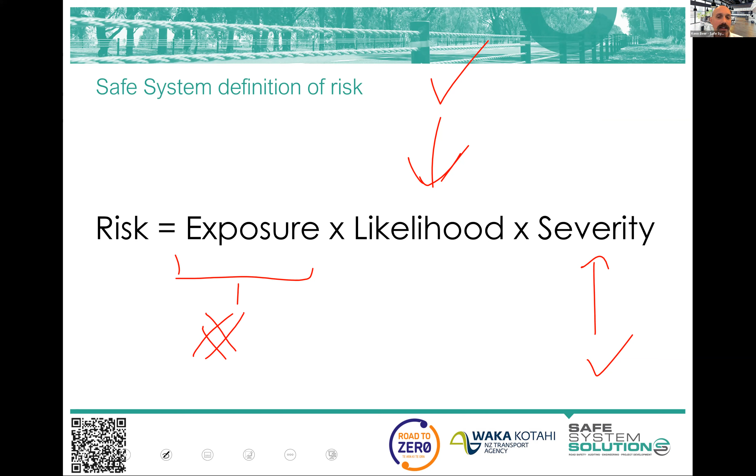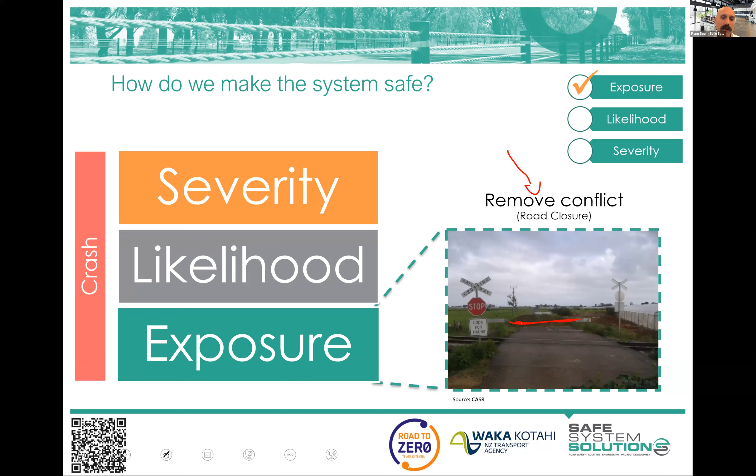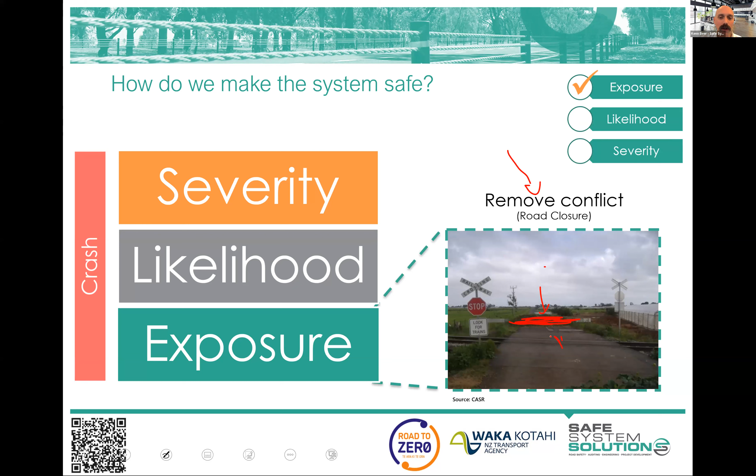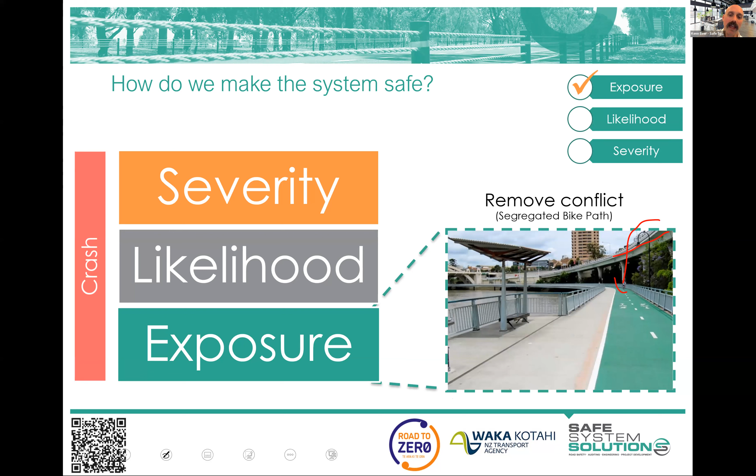It'll probably become a little bit clearer as we go into the next module. But remember, in module 1, we talked about completely eliminating the conflict with this mound of dirt from this level crossing and the road closed sign, that means there's no number of vehicles going through here anymore. Zero number of vehicles. It's bringing that back to the numbers. And again here, we've eliminated the number of cyclists using the road and mixing with traffic. They've removed or minimized the number of conflicts there because they are separated.

And when we get to starting to actually put more rigid definitions to these things, we see exposure says, what are the numbers, and it does say for how long, but I'll talk a bit about that again probably next session. We really don't in practice use for how long. So what are the numbers using the road and thus exposure? That means AADT, side road volumes, number of motorcyclists, cyclists and pedestrians walking or crossing the road.

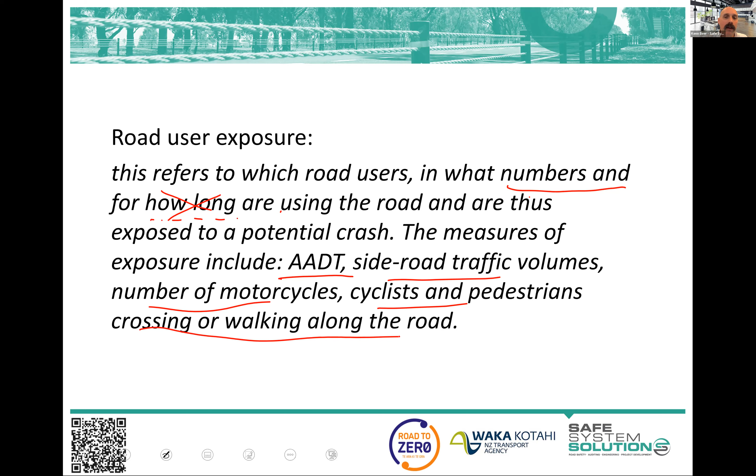Now, as we progress on to refine our ability to actually put a score to these sort of things, we've discovered that Austroads has done a really good job in creating this guidance, but there were some things that either in practice didn't work, or the jurisdictions have decided don't accurately represent things. And one of those was how long pedestrians are walking or vehicles are out there. It doesn't quite work in the way Austroads did it. So jurisdictions came up with their supplements, Victorian government, South Australian government, and most jurisdictions, including New Zealand, tend to just follow those practices.

With those supplements to the Austroads guidance on safe system assessments, we still identified a series of gaps in clarity. And people asking questions like, how do you score this? Or what is this exposure, likelihood, or severity? So there was not quite enough.

So what we've done is tried to fill some of those gaps with these particular fact sheets as an interim until Austroads does another version of the assessment framework or the like. And so you see there's safe system scoring. They're all about scoring. How do you score things? So you may be utilizing these to help you along your journey.

If you are looking at a cycling facility and going, it's a cycling lane. Is it going to influence likelihood, exposure, or severity? A cycling lane on road is a fairly easy one. We know that's likelihood. It's going to change the likelihood of crashes if the cyclist is still exposed to the ability for that crash to easily happen. But what about if we put a concrete separator in between? Is that going to change exposure or likelihood or severity? And what about if we put a barrier between that, exposure, likelihood, or severity?

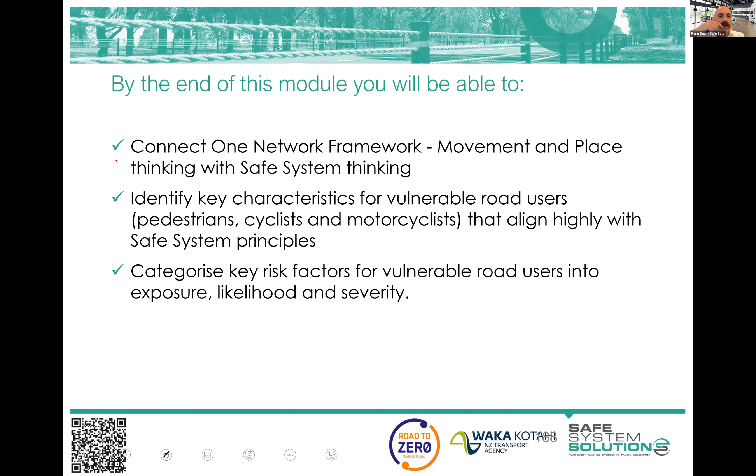So we'll start with this One Network Framework and movement and place thinking, which some of you are probably absolute experts on, and I'm excited for your input. Although for our purposes of undertaking safe system assessments, we don't need to be experts, and we don't need to be into the minute detail of this sort of strategic network planning style stuff. We need to, at a high level, sort of understand it. Why do we need to understand it?

Well, it is certainly not because it's going to change the way we score and assess an existing road or a project. Okay? Because objectives and strategic plans and everything have nothing to do with what we are assessing. We are assessing what is going to happen, who's going to be exposed to crashes, what's the chance that they're going to crash, and how bad is it going to be, right? And that's just that.

Where this comes into play in a super important manner in a safe system assessment is when we come to suggesting things to the project to better their alignment with safe system principles. We say, we like this idea, but it's only addressing the likelihood. We suggest you do this to address the severity. Well, we want to know that what we're suggesting aligns with their strategic objectives for the network and for that area, and for that road or street. And that's where we get ourselves a bit of understanding.

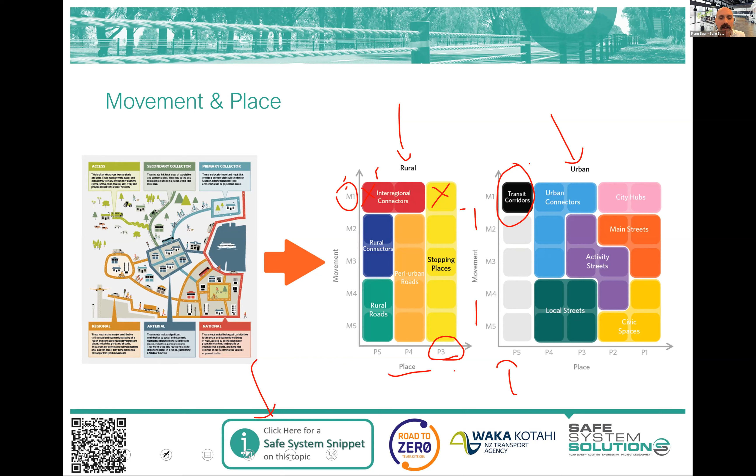Anyway, I won't delve into it in much more detail. We've got a snippet down here if you're interested. Get the PDF, click on the snippet, and you'll get a little bit more info. But let's look at these in a little bit more detail now. And what we'll do is a few little interactive exercises, because I want you to do something here.

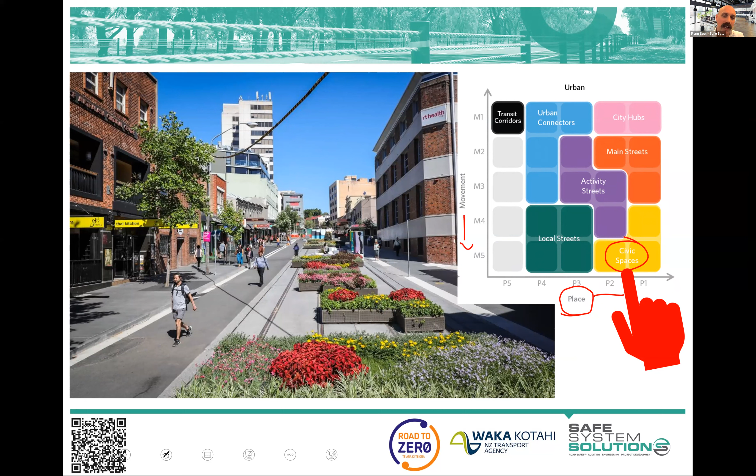What I want to do is start in this yellow civic space area in the urban environment. We saw these high place value areas, people recognizing it's got a very low movement requirement for one reason or another. Civic space. We saw a bit of an explosion of pop-up areas that were more recognized as civic spaces with tactical urbanism, and COVID hit, and then everybody jumped on board this excitement, and that's great to see, because it's a real activation of a lot of these areas to recognize their place value and clearly say, well, it is civic space and we're able to do some of this stuff.

But let's take this artistic impression, and I'll give you a few minutes to come up with ideas on what we could change to this area that would make it more of a civic space in terms of the movement and place categorization. What would make it more? What would increase its alignment with safe system principles? And I want you, every time that you pop an idea in, to put either an E for exposure, an L, or an S in brackets after it.

So you can propose a change here, and do whatever you want that increases its civic spaceness, improves alignment with safe system principles, and then tell us how you've done that with whatever you've changed, and does that lever of getting better alignment with safe system principles come from exposure, likelihood, or severity? So feel free to pop a few in, and I'll give you 3 minutes. We'll do another one of these shortly with a longer time, and then you can have your stretch and fill your coffee and your water in about 10 minutes. So let's have a pause there and back in 3 minutes.

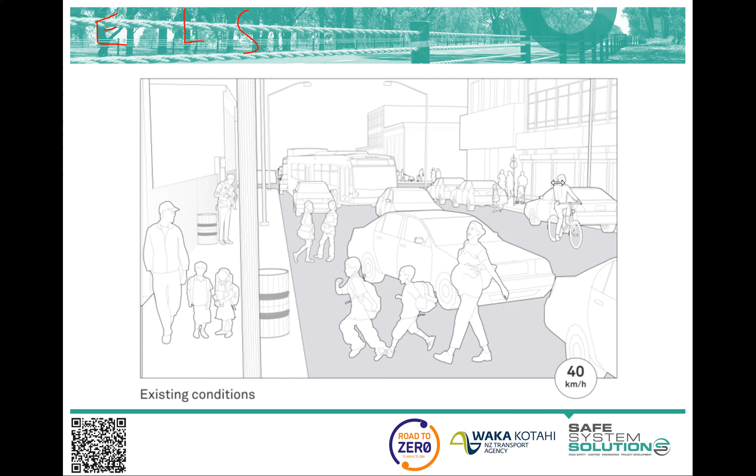Shared zone design is fun because you completely throw out road design, and you start with making it this. You can put furniture in all sorts of spots. There's one I particularly like in a regional city in Victoria, which if you ever drive through, which you usually don't because it's slow and it's annoying, which is great. There's a win all around there. If you're driving in there, you're driving along really super slow.

It's got cobblestones and all sorts of things, and then fountains start popping up in weird jets of water. It's like, oh my god, should I? Well, I've got to get out of here. Yeah, it's good. So yeah, I like that.

There's a number of people talking about traffic calming features, ways to reduce the speed. That's really good as well. If there is some movement requirement through an area, but you're trying to hold on to as much of that civic space philosophy as possible, you've got to slow those vehicles down, okay? And you've got to keep them really slow. And traffic calming features are great. Now, they are going to influence the likelihood and severity.

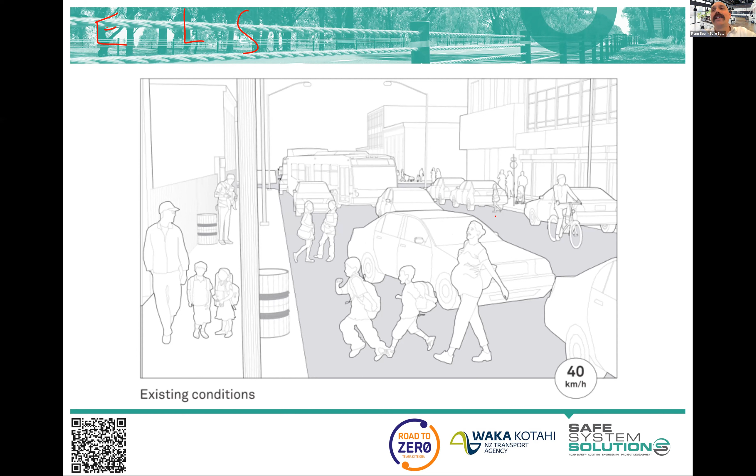I'm gonna stop reading awesome comments, and I'm gonna just show some artistic mock-ups. Okay, so maybe areas like this, there is a bit of movement still assigned here, assuming some movement is required, but it's that shared zone style area. I don't think that this artistic impression should have a particular pedestrian crossing there. It should have been a shared zone as the whole thing.

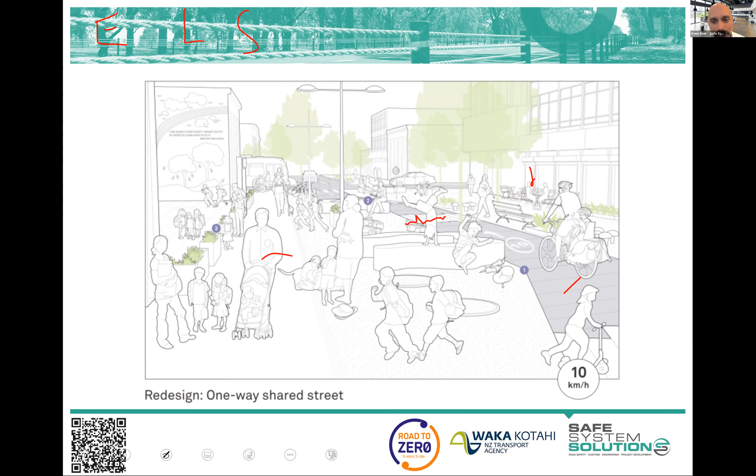And it's got good civic space elements. You can see all of the excitement and the people having coffees and playing and trading and all of that wonderful stuff. Great livability, great civic space. Got a little bit of movement through there, yeah, some good stuff. As the movement requirement rises, okay, you're still grasping onto that little bit of civic spaceness, trying to say, oh no, we're still civic space.

This is where we start to introduce, as some of you said, the idea of these bike lanes, bus lanes, dedicated areas for vehicles. We're still trying to maintain as much of that civic space as possible, and that's then as crossings come in. But you're really starting to push outside of civic space territory with this. I mean, in practical reality, this is probably how you transition these areas, or potentially. It's a bit to that.

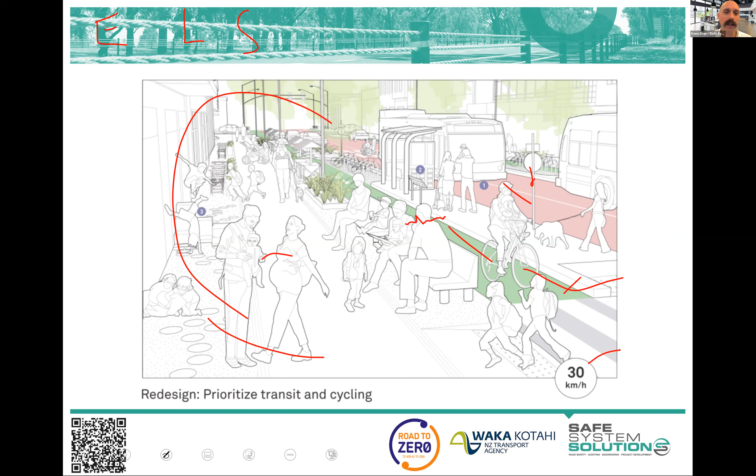Okay, I'll jump through this one quite quickly. Local streets. What we know with local streets is we're down at low place and low movement. Okay, so the residents don't like it when we tell them that their local street has low place value, but it's that societal whole of place value, different metrics that are used. But anyway, these areas with that low place value, but the low movement function gives us the opportunity to significantly

bring down speeds. Okay, if we talk to the strategic plans and our safe system assessment, and they say, yeah, we've categorized it as local streets. It's an M5 in movement for vehicles and for cyclists as well and the like. We go beauty. Because when we get to making recommendations, we can really pull speeds down significantly because they've actually actively told us we do not want people driving through here fast. We don't want people using this as a run through.

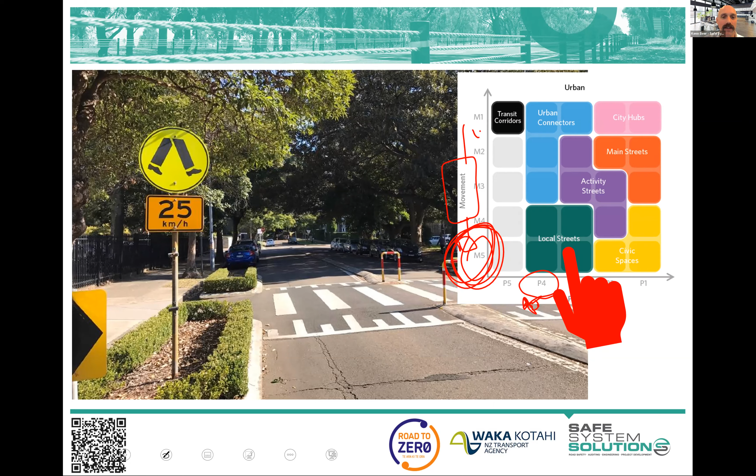That's not part of our strategic objective of this area, and our ability to align highly with safe system principles is great because we know speed's so critical to safe system. If they'd said to us it was a really super high movement, then we might be in a bit of a challenge. But it's kind of got us into an easy space there, and so this one's probably got far more place value than that. But you're seeing similar stuff to the last one where we're able to blanket speeds down. We can, by the nature of it, give it more place value because we've done some of this stuff. But anyway, some just sort of mock-ups, and you get the idea.

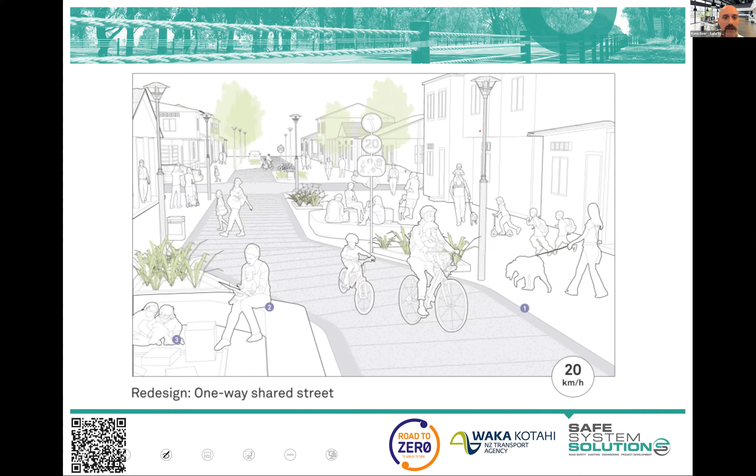But let's do a little more challenging one, and this is where we'll take that bit of time to have the stretch and the fill up of the coffee, the third coffee for the day, and we're going to go into this very

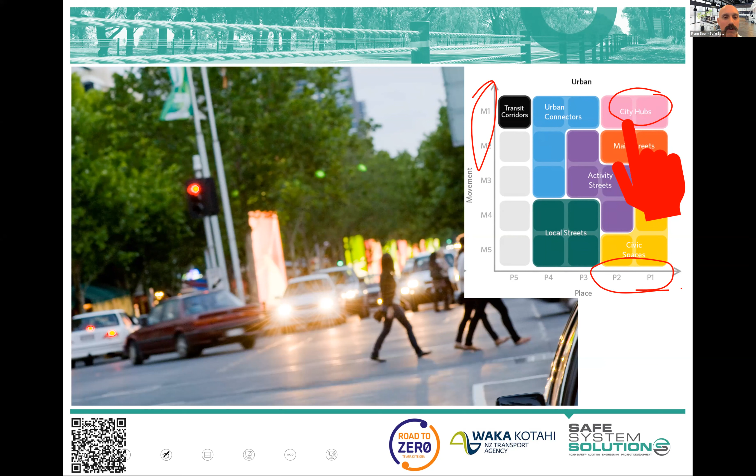prickly, challenging area of city hubs. And why is it challenging? It's because we've got high place value, but we've got high movement requirements as well. And movement could be vehicles, cyclists, public transport, but we're trying to move stuff through there, but we're also trying to have this really good high place value. So this is the artistic mock-up we're going to use for the next 5 minutes, or 5 minutes after I stop talking.

And you can see here that it's a high speed road. We do have pedestrians, we have cyclists, we have like this pedestrian overpass, we've got pedestrian fencing in the middle of the road as well. But what we're aspiring to, our strategic planners have said, with this road we aim to do upgrades to, and we want it to be in this category of city hubs, right? So we want high place value here. We want to make an important place for community, as well as have movement function for cyclists, for cars, for freight, for public transport, and for people to be able to walk through the area, as well as all of that place value stuff.

So very challenging territory, but same little exercise. Pop in some ideas on alterations to this area to give us higher place value, higher alignment with safe system principles, and movement for all of those road users. So you've got 5 minutes from now. So seeing some great stuff coming in again. Well done. Let's work our way through and we'll see what we've got here.

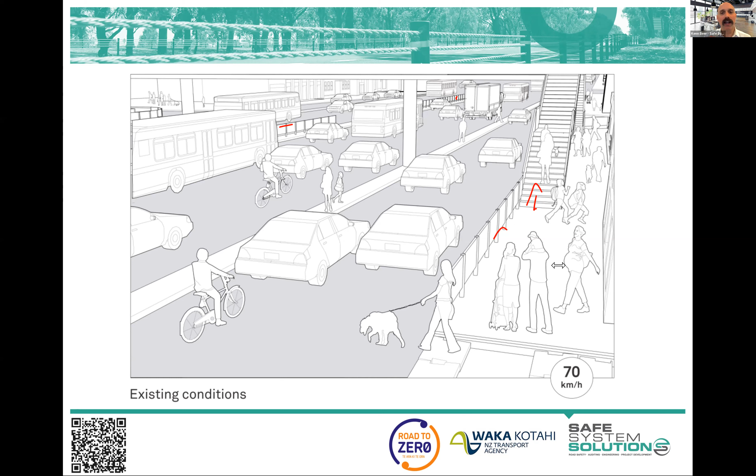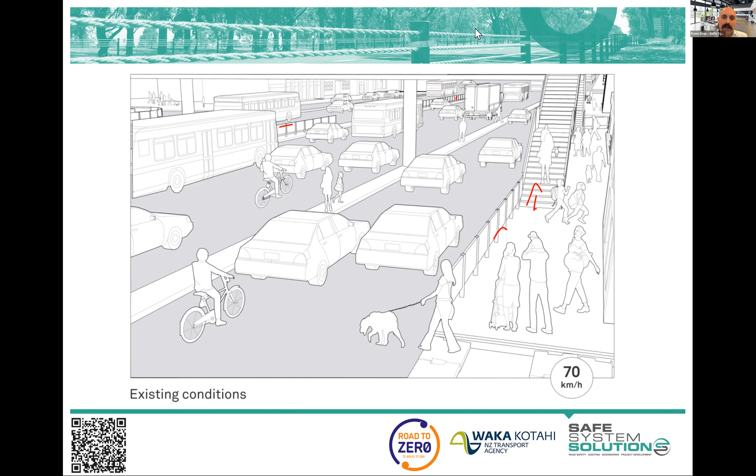I think that I've sort of covered most of the stuff happening in there, and I am liking the exposure, likelihood, and severity categorization. I think people are getting that well. I think people have generally got a good feel for the fact that movement is not just about movement of cars. It can be about movement of all sorts of travel modes and how we create those livable spaces, those places. So let's have a look at artistic impression again.

Always take artistic impressions with a bit of a grain of salt, but we see there, yeah, you've got good movement function, especially there for bikes. Pedestrians have good movement ability through the area, public transport. You know, cars, you're not going to get as many cars through there, all right? But you'll get as many people easily.

You know, it all sort of has many spin-off benefits, but from a safe system perspective and a road safety perspective, we're going to see a super highly aligned safe system area here because of speeds of vehicles, because of that separation, because of low likelihood, but also low severity of crash. Just lots of good stuff all around. And it's still retaining some nice place value, plenty of area for that social interaction, trade, and the like.

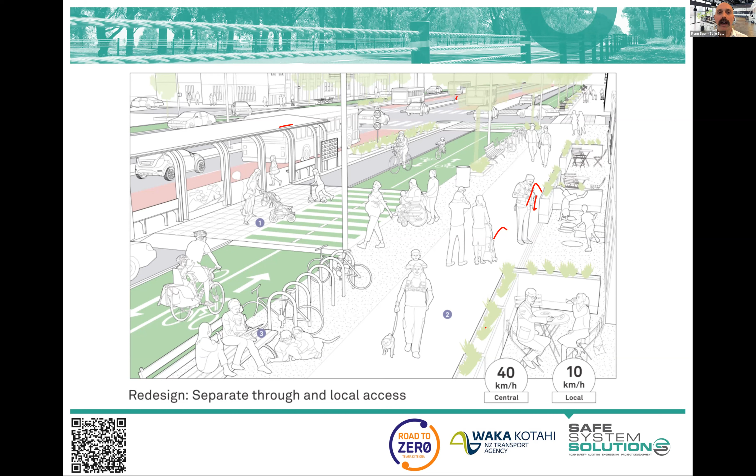When we are in these urban connectors, these are the ones where we're saying, well, place value's down, okay? We're down on place value. We're not saying that we really want people to have that interaction, the trade, the special areas in these areas. We're really about moving traffic through here. And that could be traffic, cyclists, cars, trucks, whatever it is.

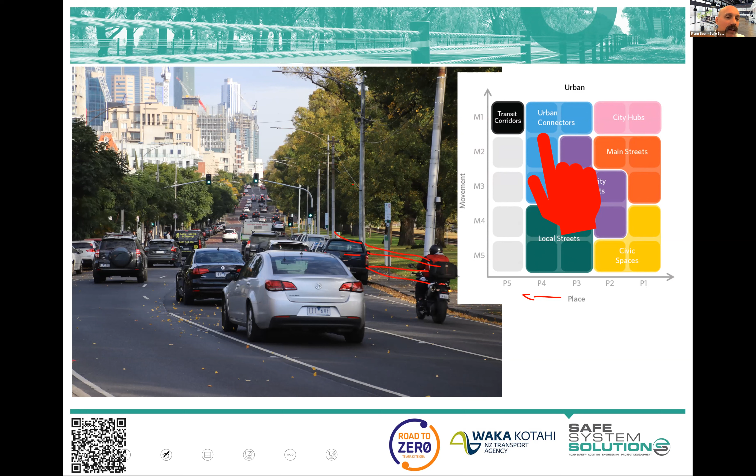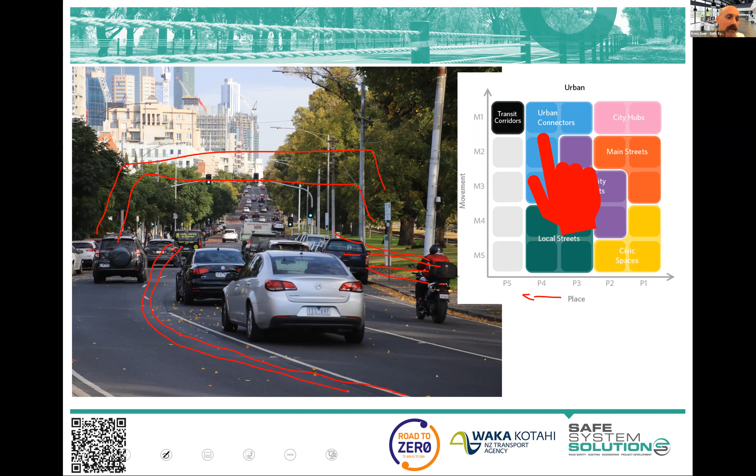But these are the areas where it's more encouraged, expected, or acceptable to do things like pedestrian fencing, like overpasses for pedestrians or underpasses, and these sorts of features. Certainly, if you've identified cyclists as one of your movement modes you're wanting in here, maybe get complete cycle lanes, and that is also very good stuff, or the like.

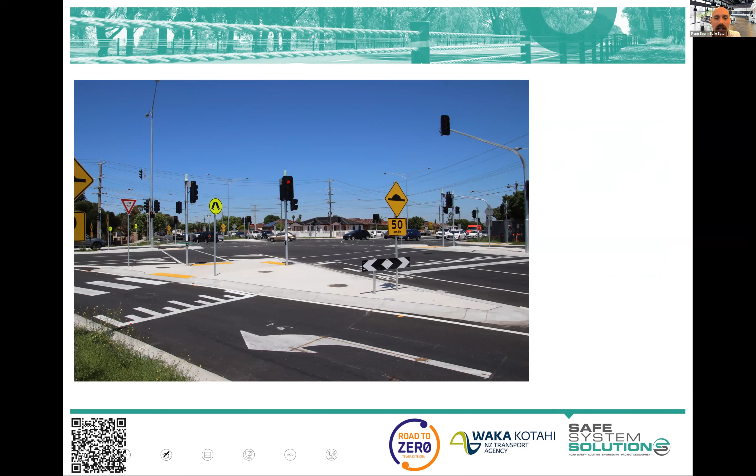But even with these, remember at those conflict points, we want to ensure that we're getting vehicle-to-vehicle interactions or vehicle-to-pedestrian interactions within our tolerable safe system levels through raising intersections, slowing vehicles down at these particular points. Which brings us nicely on to talking about cyclists and pedestrians in particular and their vulnerability and impact.

We know they are the most vulnerable road users, and we see 10% risk around the 20 km/h impact, almost certain death around the 50. Generally, that 30 km/h is seen as a point where we want to keep things below. It doesn't necessarily mean 30 km/h speed limits, but that's certainly something that's coming along quite well. But operating speeds there or below, and especially thinking about those conflict areas.

And old and young are even more vulnerable. But really trying to manage those speeds, 30 km/h or below, down around 20, where we've got that sort of interaction happening.

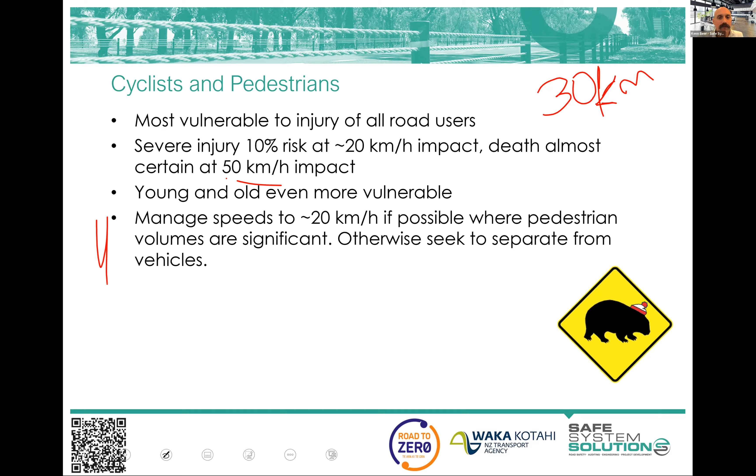Any questions or comments I should be dealing with there, Kathy, at this stage, or I'll just keep pressing along? Yeah, we've got Ben's popped in another Christchurch example. Did you want me to take over for a minute? Okay.

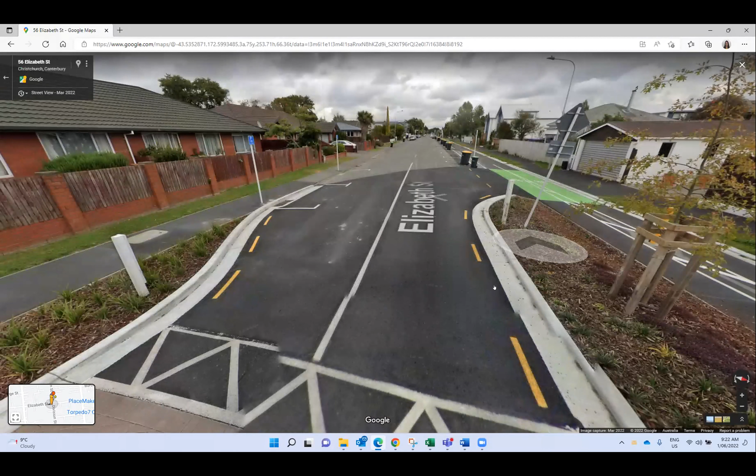This one here. Yeah, what do we got? Oh, there it changed. That's an instant real-life artistic impression. Oh yeah, look at the... That's an interesting one with the bins. I had that challenge a few times with designing separated facilities and how to deal with bins. That's interesting. Anyway.

Oh wow, yeah, okay, cool. Look at that. But if you go forward, oh wow. And look at the cycle. Wow, that's cool. But then there it's gone. Yeah. What a transformation of an area. Cool.

Sorry, you can take it back now. That's good, thank you. Thanks for sharing that. Can I take it back? Yes, I can. Okay.

I talked briefly when I was showing those scoring fact sheets about some of the challenges of deciding whether cycling facilities are exposure or likelihood reducers, and separated facilities like this become a bit of a challenge in that perspective, because you are sort of eliminating exposure to a lot of the crashes, but there may still be some of the crashes associated with side roads and vehicles turning in and out of access points and those sort of things. So there's a little bit of judgment required. I just remind you there's a fact sheet available to help you try to determine that as you go.

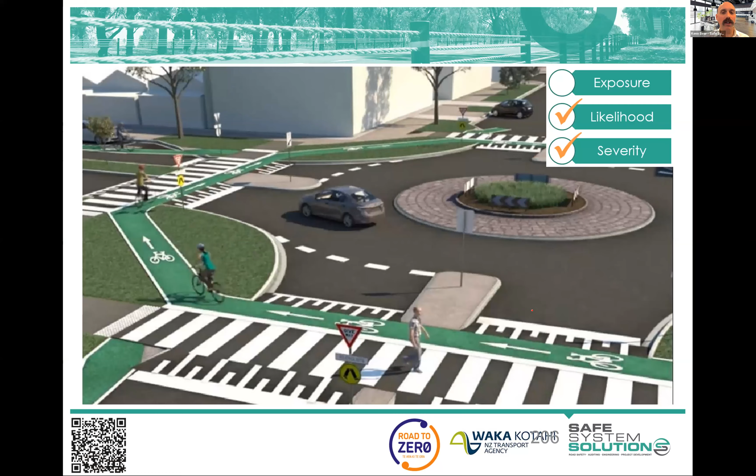When we're dealing with cyclists and pedestrians at intersections, we've got quite a few options available to us. We talked in module 2 about how good roundabouts are for that vehicle-to-vehicle interaction and the conflict angles and the increased driver alertness and all of those good aspects. But there's some challenges associated with roundabouts and cyclists in particular. Pedestrians, the research isn't really there showing it as a major road safety issue. There's certainly a lot of access issues, people don't like them, they're hard to cross, and especially elderly often just can't cross. So there's lots of issues.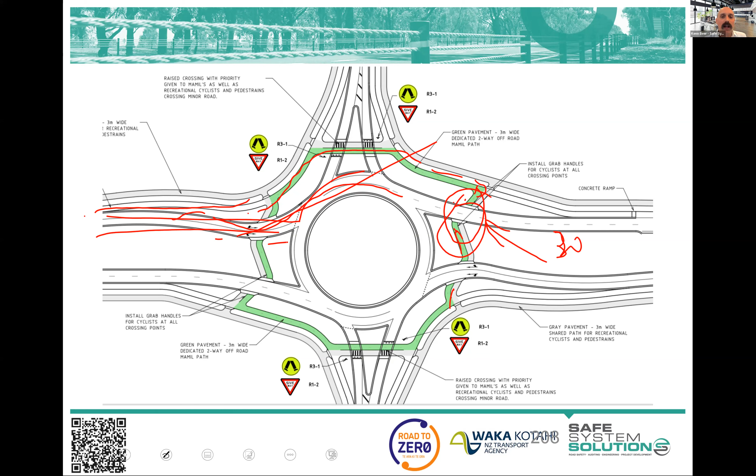No, just a little adapted diagram from a Dutch diagram, sort of that 0 to 30 is theoretically the ability to share lanes and have the vehicles and bikes interacting. The 30 is really the upper limit, and you're talking about commuter cyclists and the like that are really going to be doing that. If you're trying to encourage kids and others to ride, to fight it out with the four-wheel drives and the like in a lane share scenario is a bit ambitious.

In these 30 to 70 kilometre environments, we want physical separation with curbing and physical separators like we just saw in that Christchurch one, and you can utilise your parking setting out as well. And then when we're in those really high-speed environments, fully separated facilities. There's very low safe system alignment if you are to mix vehicles and vulnerable road users with even sealed shoulders and expect that to be enough, because we know the likelihood's down a little bit because there's a sealed shoulder, but the severity is just way too extreme, and the likelihood, while it's down a little bit, is still quite high of people drifting off their lane into the shoulder and the like.

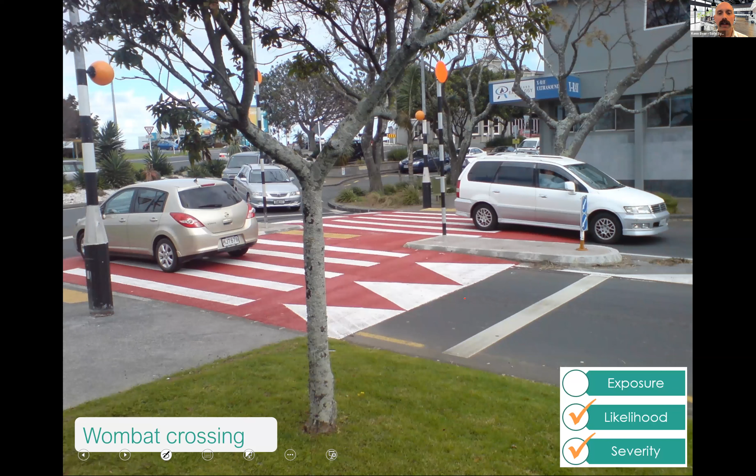So pedestrians, we know slowing speeds down is critical, but consider the pedestrian crossing points that we often make. If we have at-grade pedestrian crossings with pedestrian priority, so zebra crossings at grade, no raised features at all, we know that it either does not improve road safety or actually goes the other way and makes it worse in most scenarios. And it's because we've got vehicles still coming in at whatever speed they are, and we've got pedestrians who are crossing with priority and not really looking, expecting vehicles to stop.

The minute it's raised like this one, we know that it significantly reduces the chance and the severity of crashes. So big ticks in likelihood and severity. And this is a New Zealand example. I understand red is not the flavour of them anymore. You don't do red, but putting that aside.

So I have a sort of rule of thumb. My general rule is if we have an area where we've decided there's enough pedestrian activity to warrant pedestrian priority, or we want that, or we're encouraging that, it should be a raised crossing, or it should have speed calming measures on the approach to ensure vehicle speeds are down around that 20 km/h mark at that crossing point. So to me, no excuses really. People say, oh, but it's a freight route. I say, okay, well, almost even more reason to slow vehicles down.

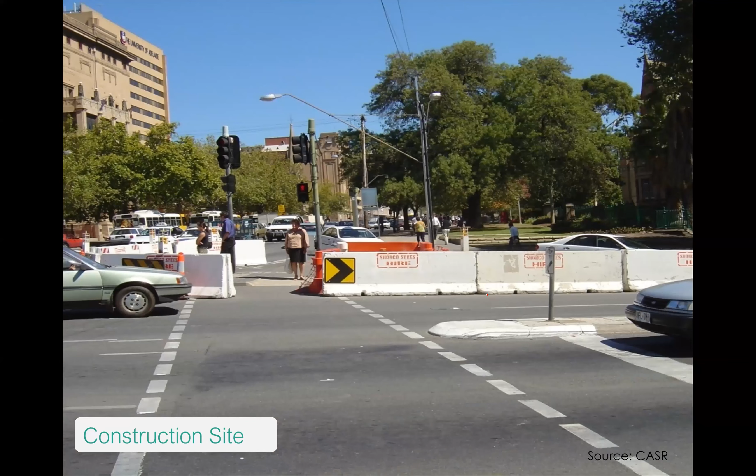I use this little analogy to show that I actually think we've known for many, many decades what a safe system is for vulnerable road users.

And this is an example quite a while back in Adelaide, and it is an area where we've got a couple of workers down working in this sort of general area. They're doing electrical works in the islands there and the like.

This is a 60 km/h road, but at the time, because there's workers in the area, it went down to 25 km/h, which is the South Australian work zone speed limit. I haven't seen others use 25. Most seem to use 40, but anyway, these are 25. The barriers were put in place for that,

creating that separation there. And they do their work a couple of weeks, all the barriers are removed, and the speed goes up to 60 km/h again, and then about 3,000 pedestrians a day cross here and here and here. So it's exactly the same vulnerability of user, isn't it? The worker, the pedestrian crossing, they're all the same vulnerability. It's just we look at one that we want to protect and keep safe, and the other we lump all of that responsibility onto them as an individual.

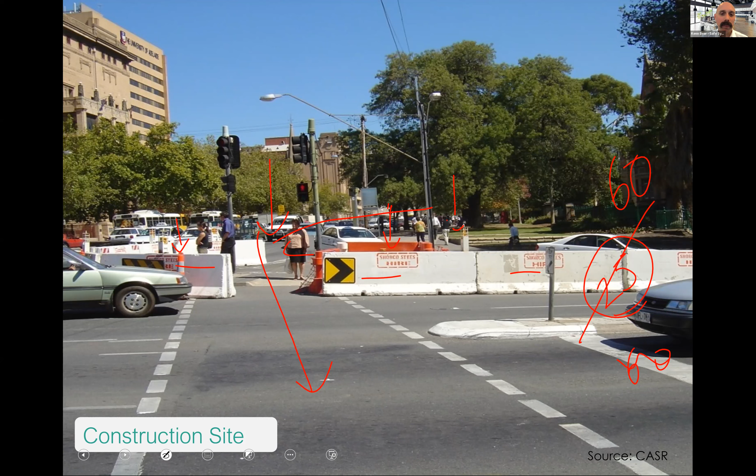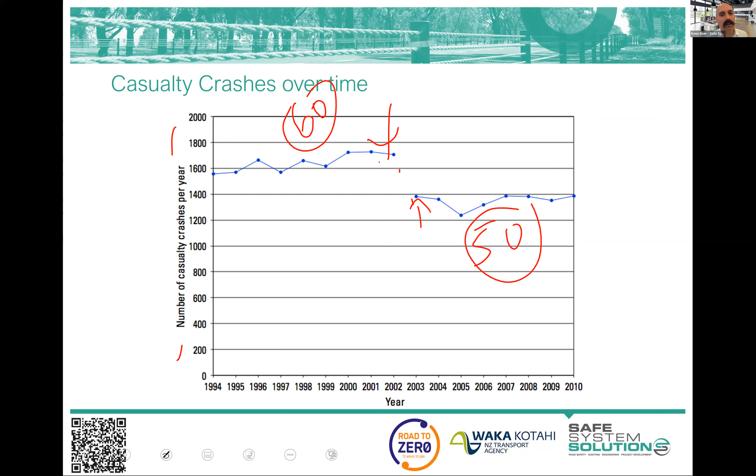In terms of speed limit reductions, this is when the default speed limit went from 60 to 50 kilometers per hour. And you can see the drop there just with that change in default speed limit in urban areas. It's pretty impressive to show that. And there's a lot going on in the speed management space in New Zealand.

Okay. I'll be fairly quick through motorcyclists, as I say, to try and give you 10 minutes to finish off a few lingering things and your quiz.

So I like to think of the 5 S's of motorcycle safety, which I've talked to some of you about in different things in the past. The ability to see a motorcyclist and the ability for a motorcyclist to see what's ahead, the sight; the surfaces provided; the signs to warn, inform, guide. Then what happens when a motorcyclist crashes, and what are they striking, or what is striking them? And then the speeds that all of this happens at.

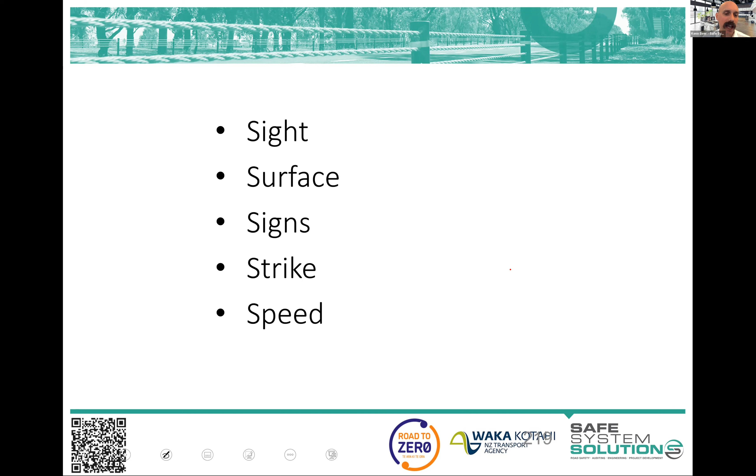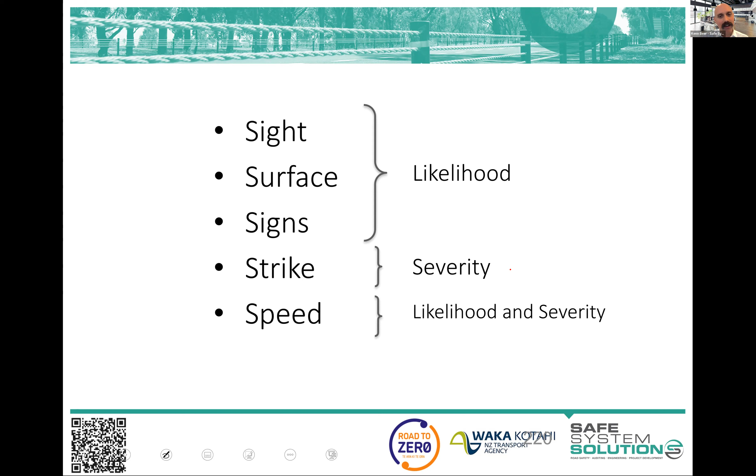And if we sort of look through those 5 S's, we see that all this sight stuff and the surface stuff and the sign stuff are likelihood influences. The strike is when we've got the crash happening, and what is being hit is the severity aspect. And speed, as I keep talking about, both likelihood and severity.

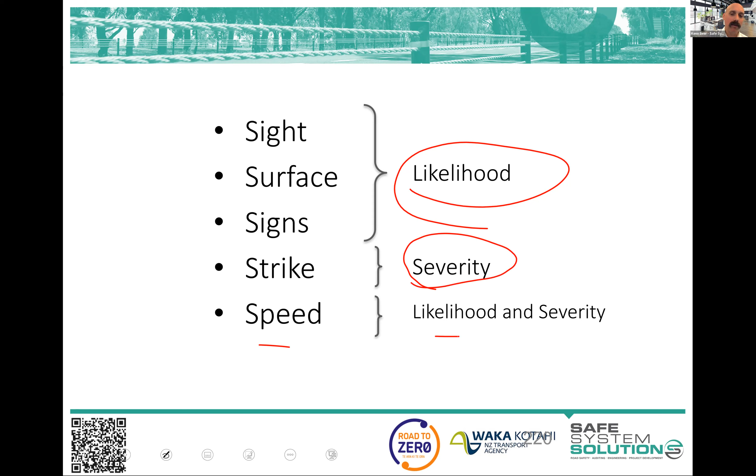Now, there's been some recent research into biomechanics of injury in motorcyclists. A colleague of ours, Johan Strandroth, has published some work with some others around this, and pretty interesting stuff. But what we've discovered is that motorcyclists sit between cyclists and pedestrians and passenger vehicles in terms of their biomechanics of injury.

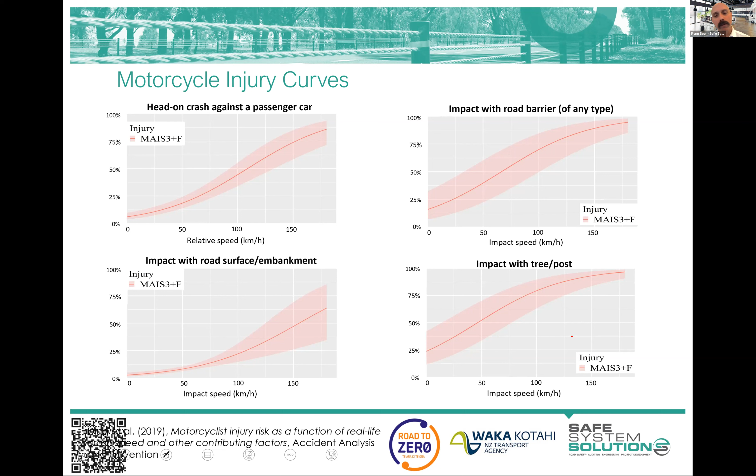So even with helmet, the best safety gear on, a motorcyclist is nowhere near as protected as a person in a passenger vehicle with extra crumple zones and airbags and seatbelts and the like. But they're a bit more than a cyclist or a pedestrian. I put those in for your reference.

When we think about the surfaces we provide, motorcycles are highly susceptible to surface irregularities due to the fact that they take curves or corners on a lean like this and have small contact patches. And so, if that slips out, center of gravity, they're down. So the surface becomes this really important spot for motorcyclists, who are referred to as the canary in the coal mine when it comes to surface issues.

And we think about that not just with the vision of potholes and shoves and ruts and bleeding pavement and all those sorts of things, but also in terms of things we're introducing in there, like steel plates, pit lids, and the like, and the fact they could be slippery when it's a bit wet. Riders may not see it because they're following behind other vehicles or a truck, or it's at night. So these are increasing the likelihood of crashes.

Speed. Speed can be managed through advisory speeds, regulatory speeds, through local area traffic management, through all those other features we've talked about throughout this course. And they're all beneficial for motorcyclists, and they're going to address the likelihood and severity of crash. I don't get concerned if motorcyclists are following the advisory or not, as long as your advisory speeds are consistent throughout the route and the curves. It's almost a sign of what's to come, not necessarily exactly what you should stick at, and that's all about reducing the likelihood of crashes.

Kathy, questions or anything else to cover, or did you want to show anything? Yes, I do actually, but there was an earlier question about raised crossings. What is the ramp grade preference for a raised table zebra crossing? 1 in 10 or 1 in 15? We're getting into specifics, aren't we? Yeah, there's some specifics around that. We did a safe system snippet on that, and it's all about what speeds you're particularly aiming at, and then your vehicle usage and a whole lot of other things. But you can do longer ramp grades, higher ramps, and alter your ramp grade accordingly. So perhaps we can just link to that snippet. Yeah, I can do that.

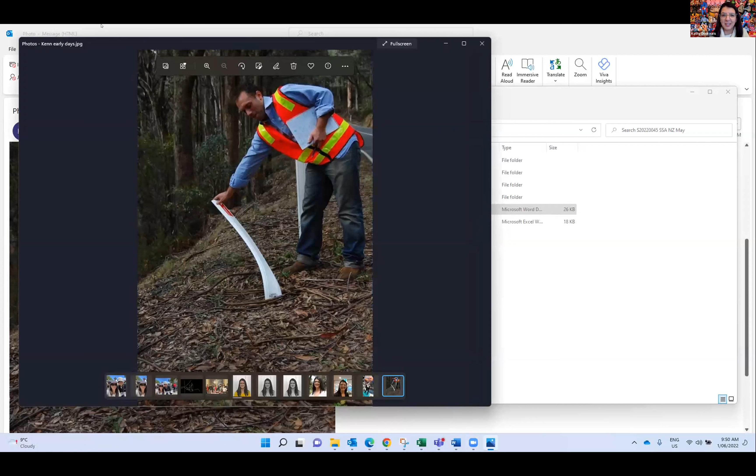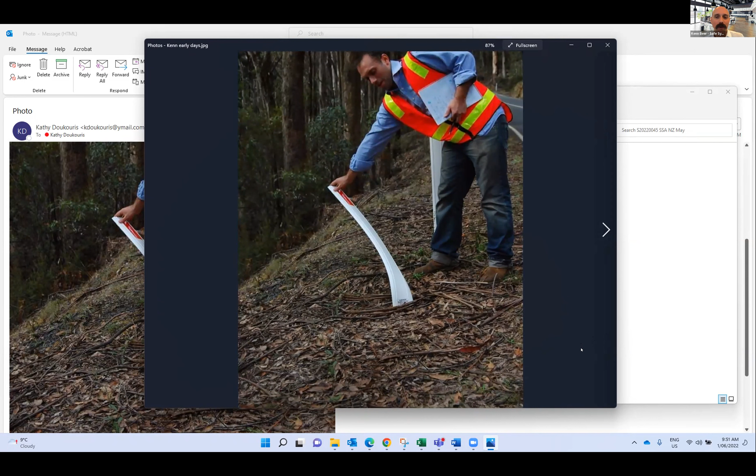Now tell me what's going on here. Why are you dragging out old photos of me flexing guideposts? There was a time when guideposts used to be a motorcycle specific hazard, and I can't even remember where I was, but we were just auditing the number of guideposts that were flexible versus the number that were motorcycle specific hazards.

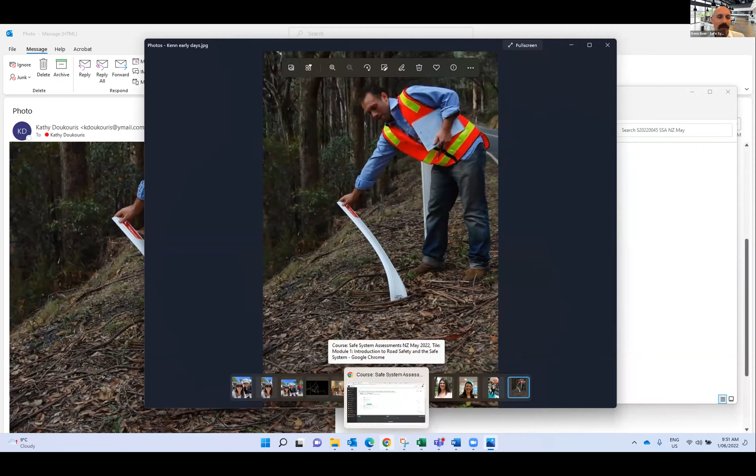Look at how much hair I had. I know, right? And no moustache. Okay, enough old photos of Kenn. Where are you getting this stuff?

I have my sources. You've got to watch out.

Okay, so we're in module 3, and what do we have? We have the module 3 quiz here, and I was also going to show you just quickly.

I can't get my thing to move. Sorry. Oh, it's all a mess. Now look at that. I spent too much time on the funny photo instead. No, that's not it either. Anyway, I'm going to stop sharing for a minute. Oh.

Okay, there's some comments in there from Bianca. Oh, cool. I'll have a look. So why don't you have a look at that, and then I'll find the bit that I was trying to find. Can you say?

Yeah, so it's a really good point Bianca's making around the fact that if there wasn't the barrier system or something there, what is behind that is also going to be a significant hazard for motorcyclists as well. So you do need to, I suppose, have a think about that.

I did a series of making roads motorcycle friendly. This is road design, management, operation, maintenance of roads for motorcycle safety around New Zealand. It was a great week, darting around running that session.